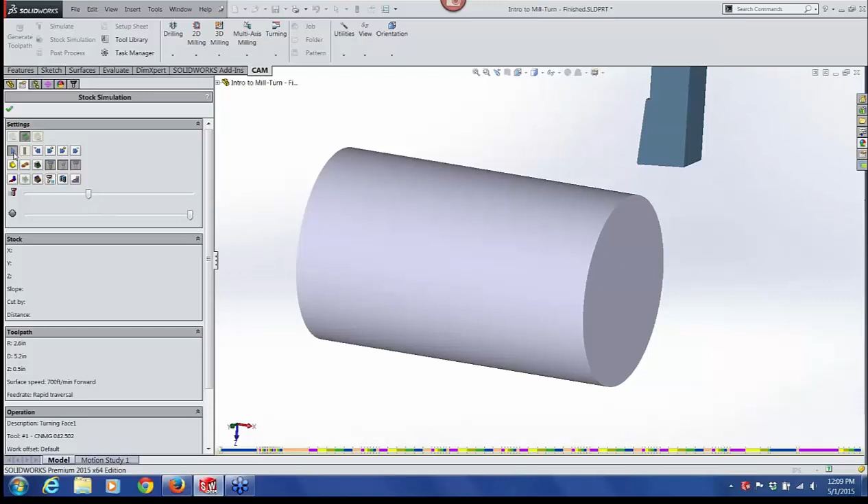Facing off the top of the part. Rough turning the OD on side 1. Come in and do a side groove. Now we're drilling side holes around the outside of the part. We came in there with a 1 1/8 spade drill, and then we are now boring the inside diameter.

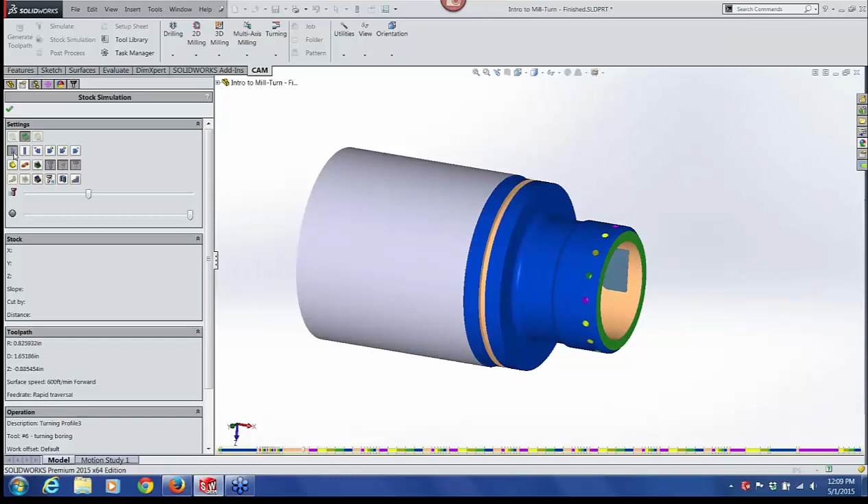2D adaptive cut, roughing out these slots around the outside of the part, and come back with a finish cut.

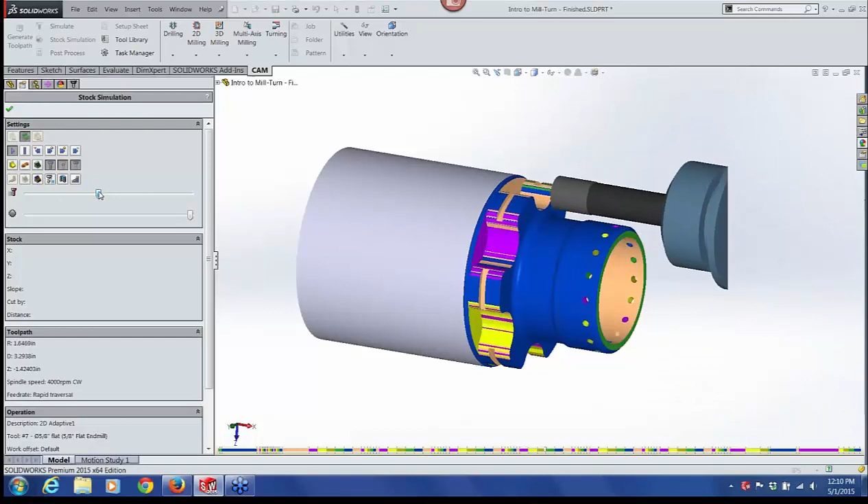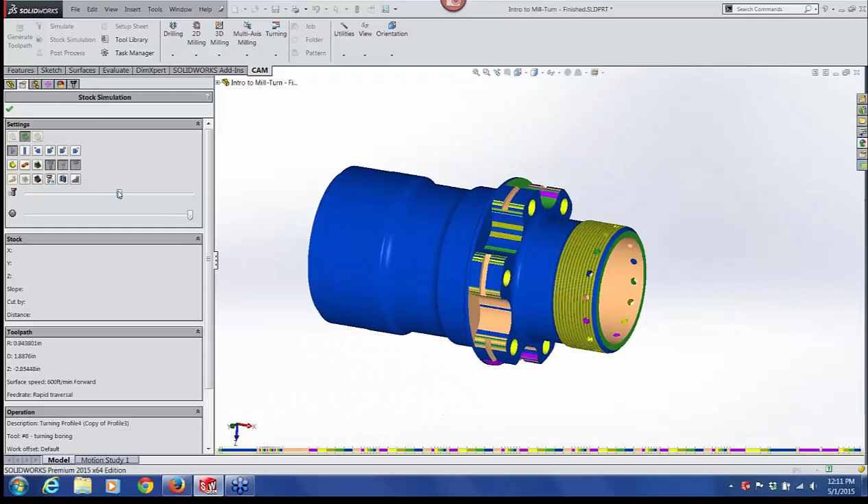The drills went kind of fast there, but we drilled into the face, drilled and reamed, and threaded the front side, and now we're working on the back side. Let's see how far we can get on the front side, and if we've got some time left over we can take a look at the back side.

Alright, so there's the end of our stock simulation. Click OK here, and let's take a look at how we have this part set up.

I'm going to basically recreate the setup and start from scratch. So the first thing we want to do to machine a lathe part, as on the mill side, is create a new job folder or a new job setup.

Now under this first drop-down menu, we can set the type to turning. As in milling, the first thing we want to do is define the model that we're going to machine.

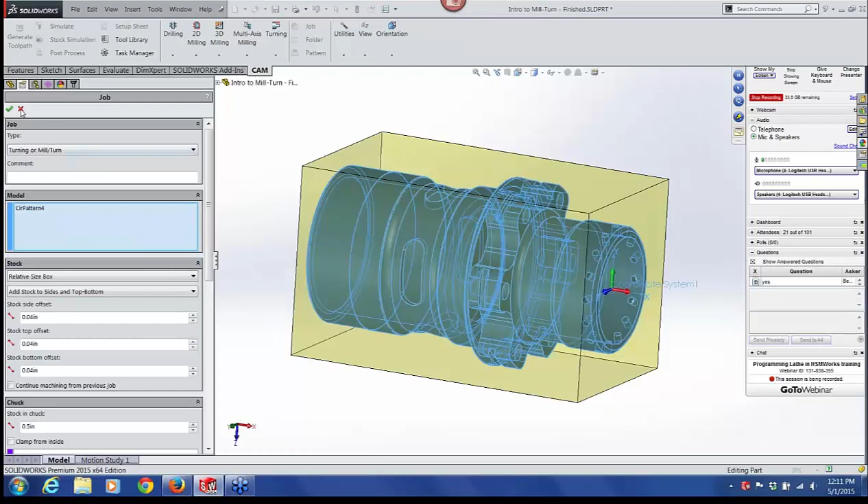Actually, I'm sorry, I need to take a step back here. Let's cancel out of there for a second, because what I really wanted to do first, since this is a lathe part, is note it has a lot of milled components on it.

So what we're going to do is create a spun profile. This is going to allow us to define a round part that would have typical lathe geometry on it. So I'm going to create a spun profile.

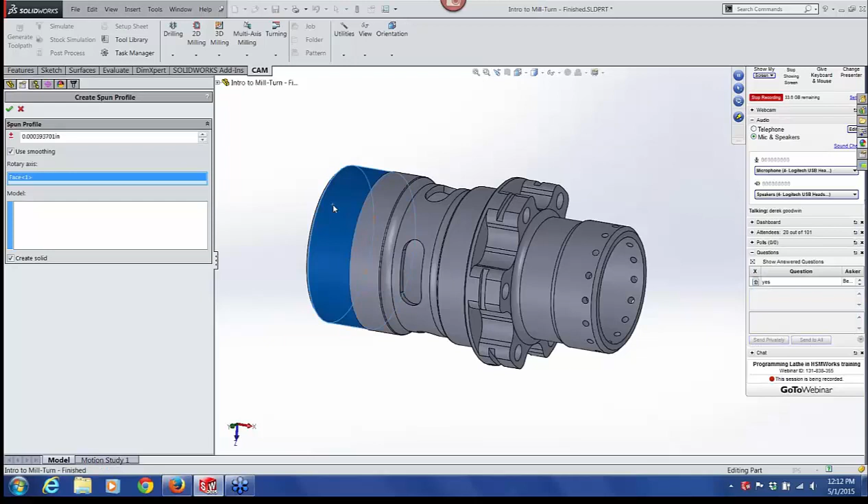I'm going to select a rotary axis. I'm going to select the model, and click OK.

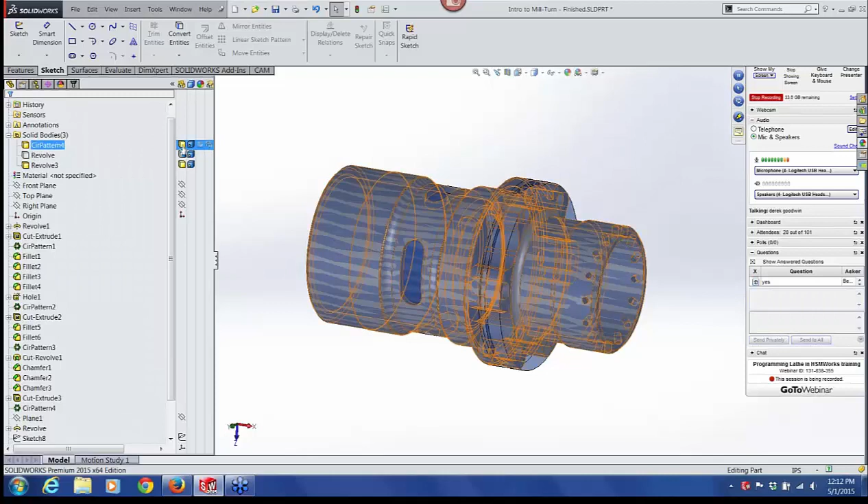And if we look back here, what SolidWorks has done is actually created a spun profile of the part. It's basically turned it into a lathe part and removed all of the milling features.

And I have 2 of those bodies now since I've done this spun profile twice.

Okay, so now let's go ahead and get started. Click on the job folder, turn this into a turning part, and the model is populated with both models.

So what I'm going to do is deselect that, and then I can just pick the spun profile.

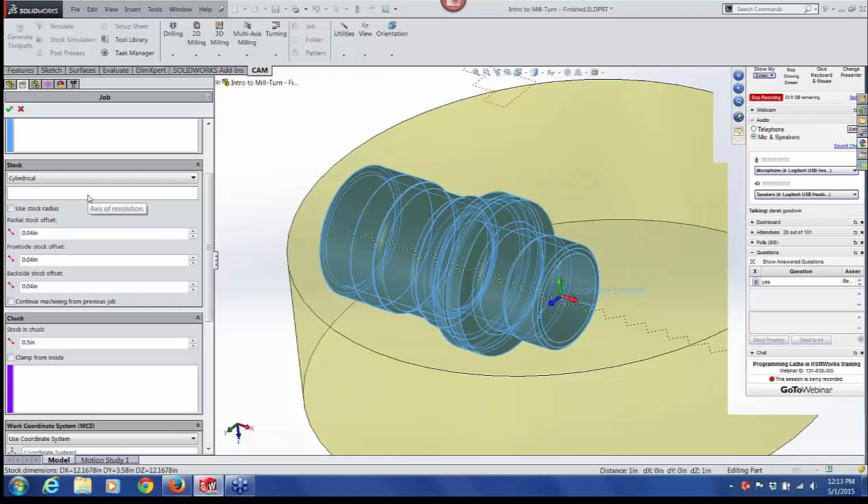Now under stock, we're going to start with a cylindrical part, and then we need to pick a cylindrical face to define the orientation of the stock.

We're going to, instead of just adding values, use a stock radius. So 4-inch bar stock seems to be pretty close for what we're going to need. So I'll go ahead and type in a 2-inch radius.

I'm going to type a home position of 0.5. This is the first Z position the tool goes to after a tool change, when the turret rotates and it rapids back towards the part. We're going to get a home position, so 0.5 is going to be the home position.

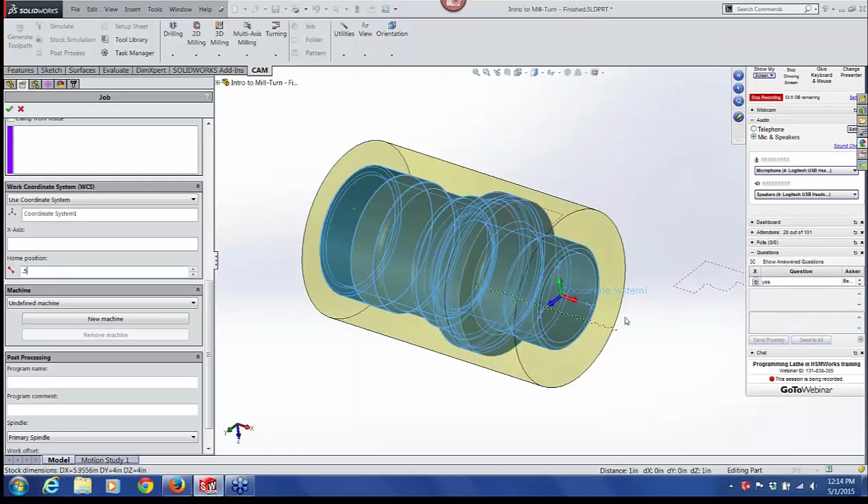And my jaws are sitting out in space here. I'm not sure if I'm doing something wrong. Okay, I still have not defined my work coordinate system. That's the problem.

So for my work coordinate system, up until now on all the mill classes, I've been showing you to pick a work coordinate system or to create a work coordinate system in SolidWorks. In this case, I'm going to create a work coordinate system using model and orientation.

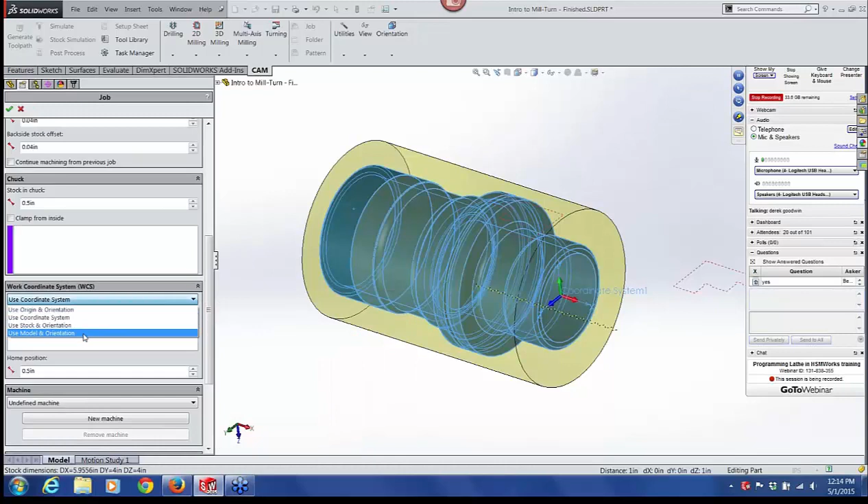I was just checking my questions page, and it looks like Pete was pointing that out to me, saying, hey, show us how to set that up.

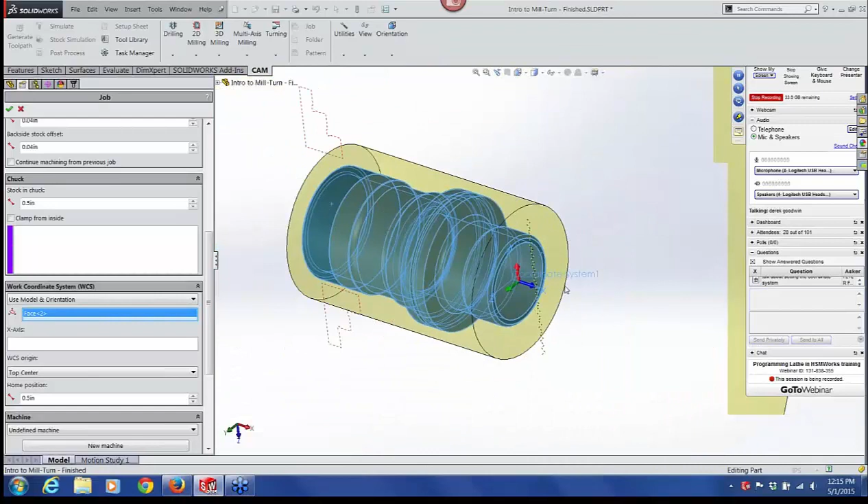So what we're going to do here is use model and orientation, with the selection box ready to go, and pick the face of this part. We've picked a face, and that's automatically set our part orientation, so you can see the Z-axis in the positive direction is aligned with the center line of the part, pointing out toward the tool turret.

And that should really do it. We're going to make this part in two ops, so it's being held in the jaws. I might take that up to maybe 1 inch, just to make sure I'm clamping those pretty good. That gives you a quick view of how your part's going to look, and I think that'll do it for job setup.

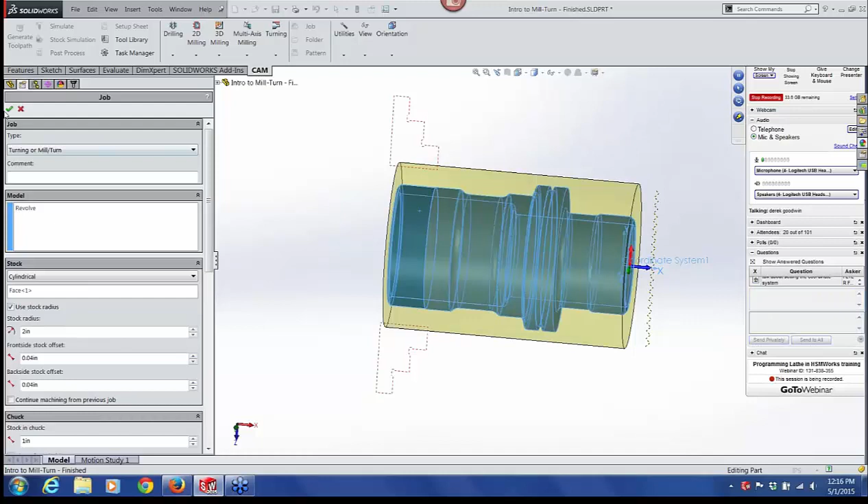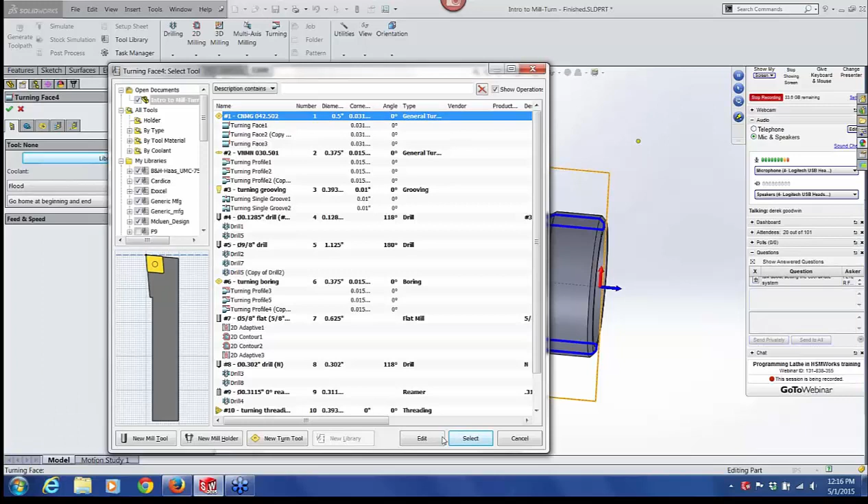Okay, first thing we're going to do is just face off the part. Go ahead and select the CNMG 042 turning and facing tool. On the facing toolpath, you just need to click OK because we've got our stock defined and our model defined, so it knows what to do.

I'll give it a maximum spindle speed of 3,500 and click OK. Again, my default behavior in HSMWorks is to just click OK and see what the toolpath does. It usually gets me pretty close the first time, and if it doesn't, I can always adjust things.

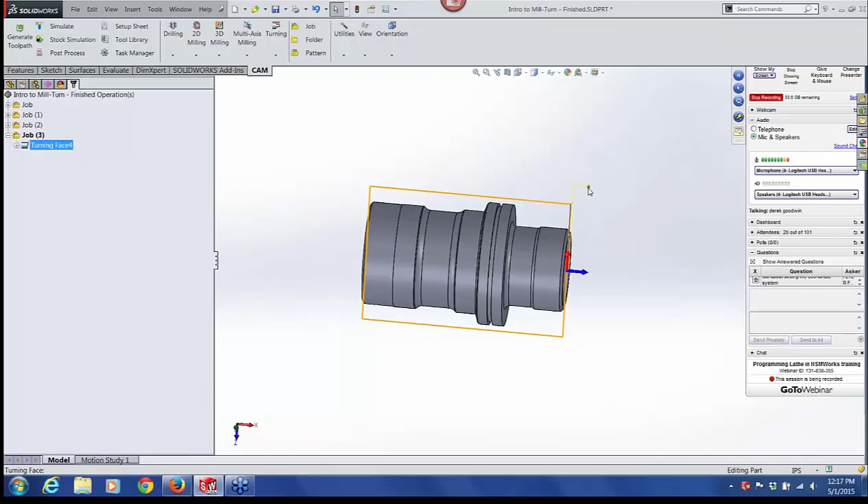Okay, we have a facing toolpath. And if you'll notice this little dog leg here, when I set the home position to 0.5, this is what I meant. The home position is basically half an inch off the face of the part.

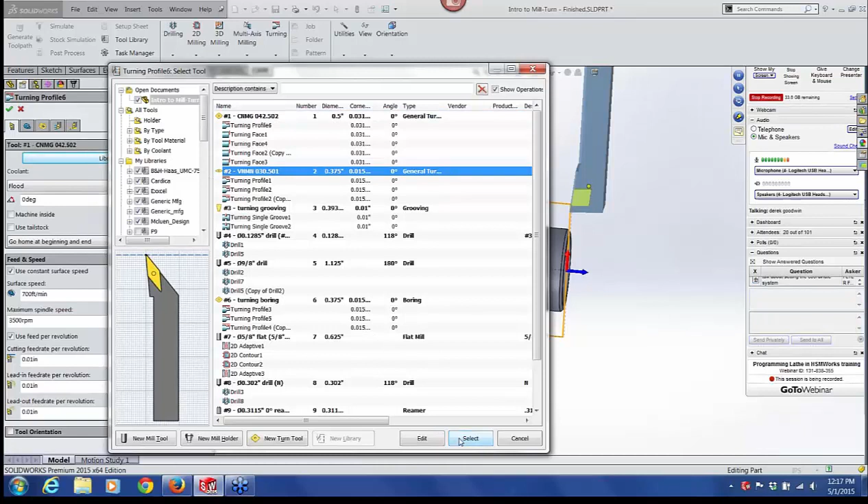Okay, the next thing we're going to do is turn the outside diameter. Click on Turning Profile, pick a different OD turning tool, and click on the Model tab.

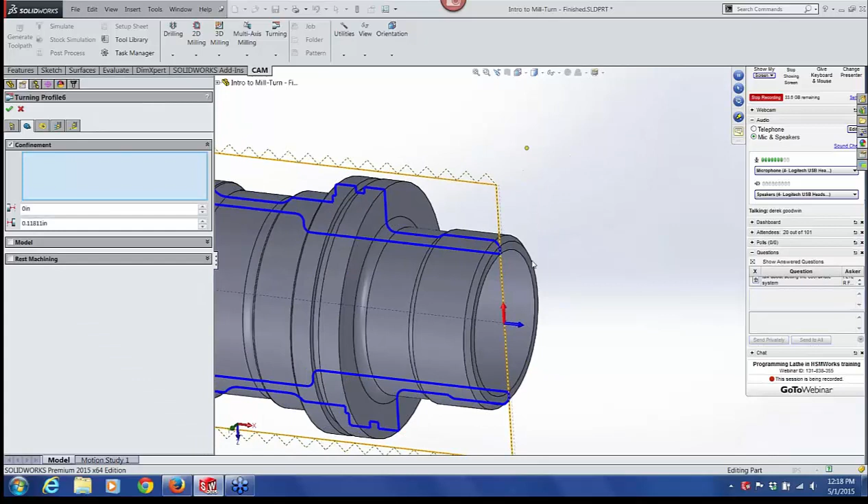Now, the model's already defined, but we don't want to cut the entire part, so we're going to set a confinement, basically a boundary, to stay within. I'm going to pick that front face and that back face. You'll see this almost looks like threading geometry up at the top — it shows you where we've constrained the cut to. Now, for the model, we've got a couple of models, so let's make sure we're choosing the spun profile.

So I'm going to expand the SolidWorks history tree and just define that revolved model to make sure everything's good. Let's click OK and see what we get.

So that looks pretty good. It's turning a little bit past the edge of the part, and I think it's a 35-degree angle on this insert, so it's allowing the insert to dig in at the back.

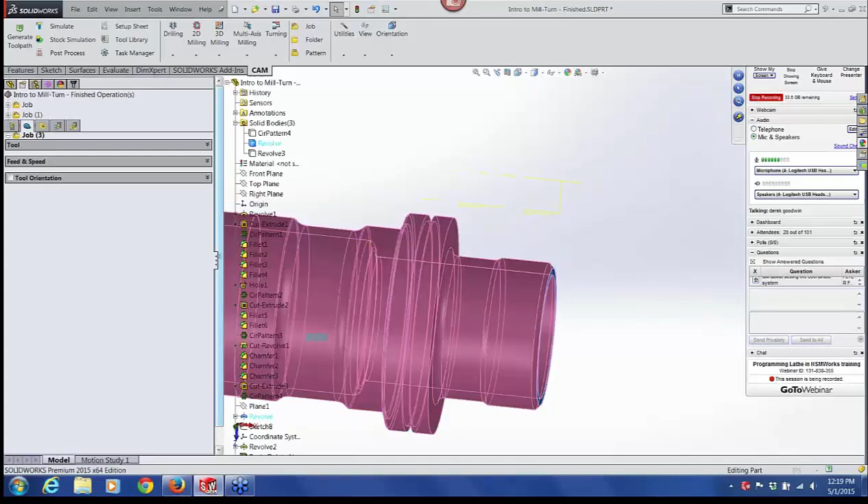I don't really want it to do that, so let's go back here, right mouse click and edit the cut, and I'm going to take this confinement down to 0. Right now it's forcing it to overcut in the Z-direction, going past the face of that part by 0.118. So let's put that back to 0, and that's a little more like what I want to see.

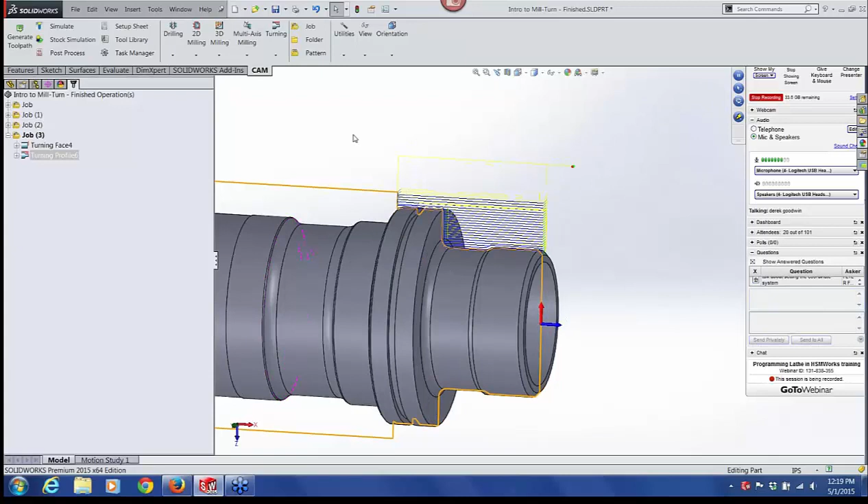So we've got the part faced, we've got it turned. The next thing we're going to do is machine this groove. So I'm going to pick turning, single groove.

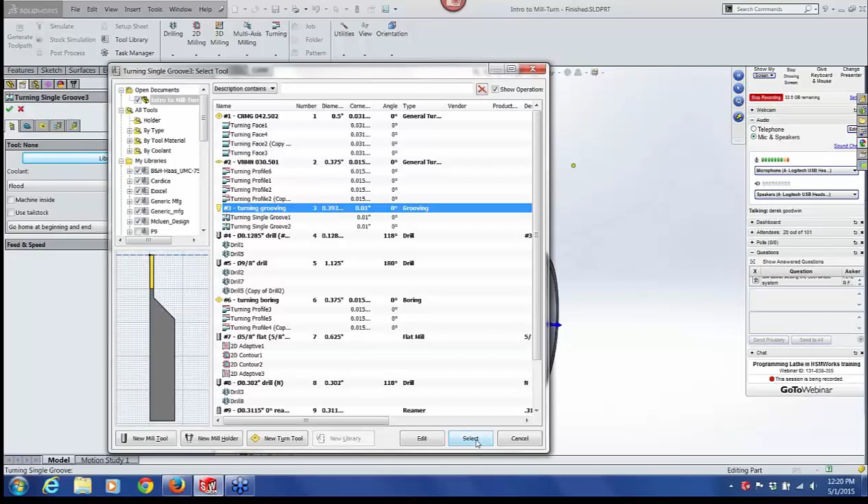On the first tab, I'm going to pick our grooving tool. For the geometry tab, I'm going to click in the selection box and pick that far face of the groove.

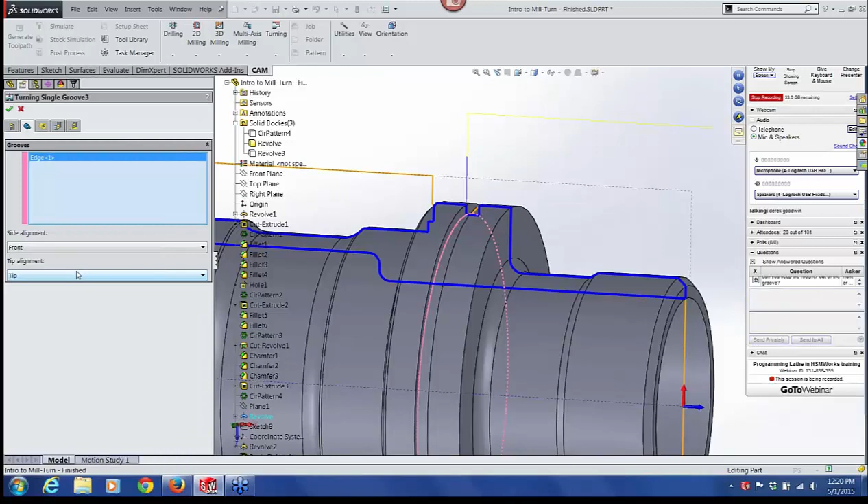And then on the heights tab, if I left this set to model bottom, it would actually machine that groove all the way through the part. So what we're going to do is pick a selection for the bottom of the cut, and now we're going to pick that face. You can see this blue cylindrical shape gives you an idea of the depth of your cut.

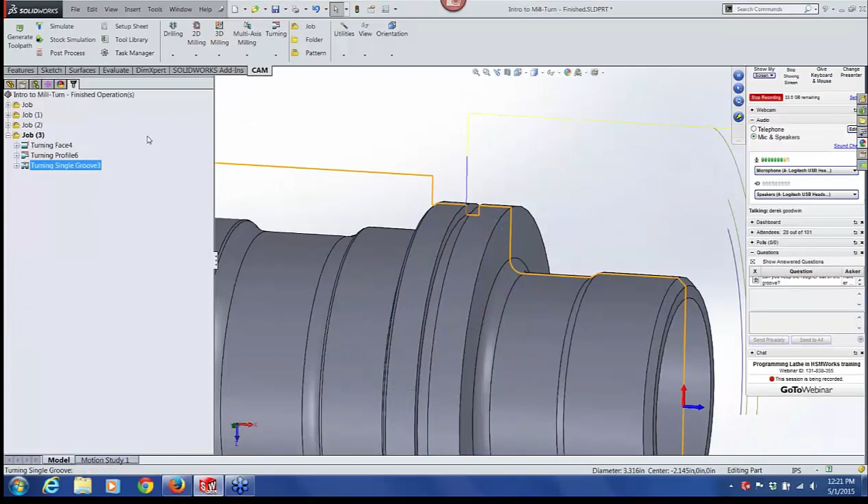So all of that looks pretty good. Let's click OK and simulate, and see what we have.

Okay, I like that. Just take a moment, let me check our questions pane quickly. This is going to be a little bit tricky since I'm working on one monitor today, so it makes it a little bit difficult to read my questions. I'm actually going to undock that for a second.

Can you keep the rougher out of the groove? I'm not sure about that. Let's keep that question for a moment, and maybe I'll get CJ online here in a minute. He's a little bit more experienced than I am on the lathe stuff, and see if he can help us with that.

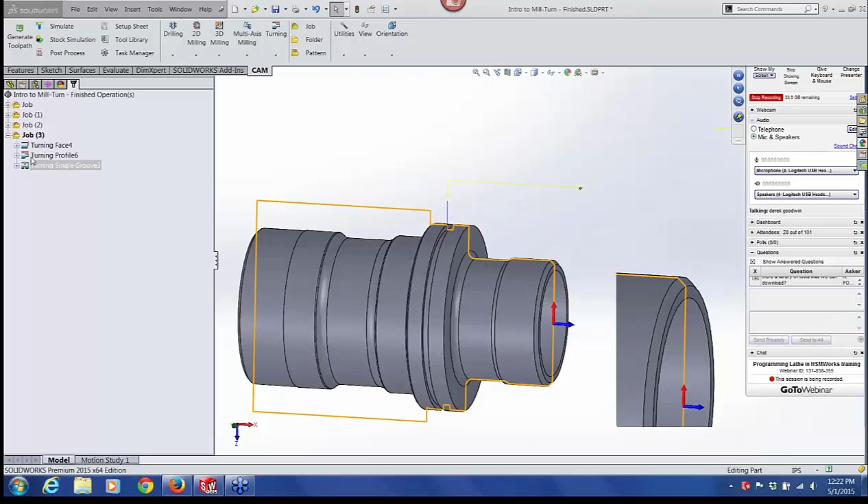Yes, thanks CJ. Short answer is yes. So how would we do that? There's a check mark in the Passes tab called Allow Grooving, you would just uncheck that. Okay, let's go ahead and do that, take a quick look there. So that would have been in this turning face - right mouse click, edit, and is that in the Passes tab? Allow grooving, uncheck that box. Click OK, and that keeps it out of the groove.

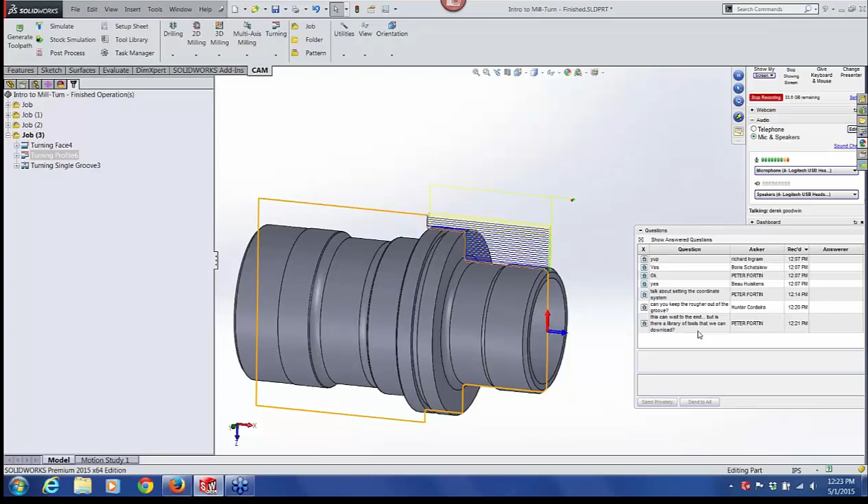Okay, hopefully I can find this question pane again later. I'm just going to kind of drag it down here.

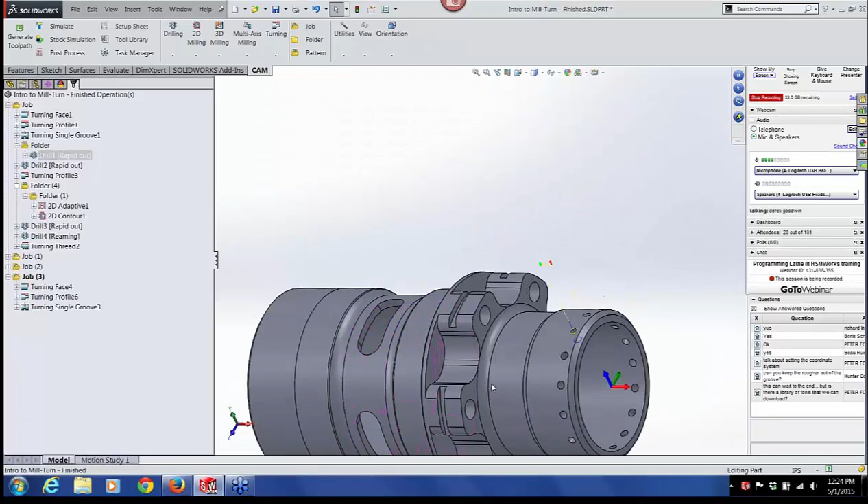Okay, what are we doing next? Let's see, we are going to drill the side holes. So what I'm going to do here is go back to the SolidWorks tab and make our actual part visible, and take a quick look at what we had going on here. Okay, so we're going to drill first that side hole, and then we're going to add a circular pattern to drill that hole around the diameter.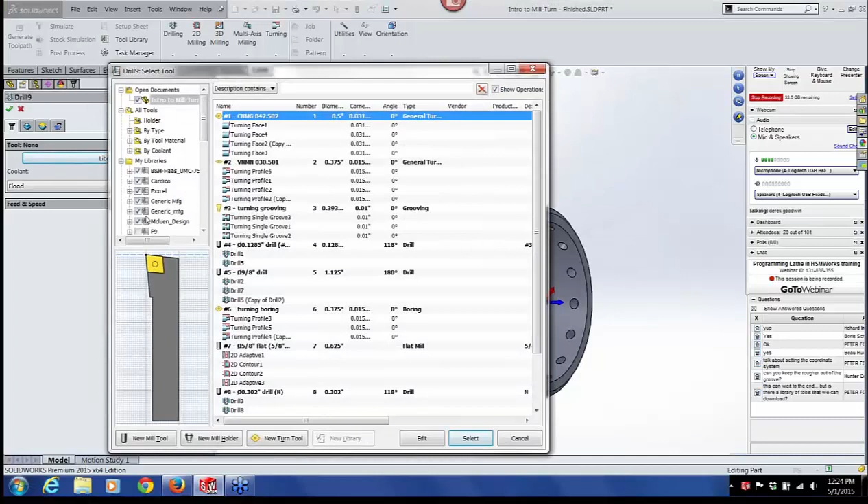So, drilling - drill. I'm going to pick a 0.1285 diameter drill, select that tool. Click on the Geometry tab. Now the first thing we want to do here is to set our tool orientation, so I'm going to check the box. This is basically telling it that we're working in a different orientation than we were on the lathe, because the Z-axis now needs to flip out to the side of the part.

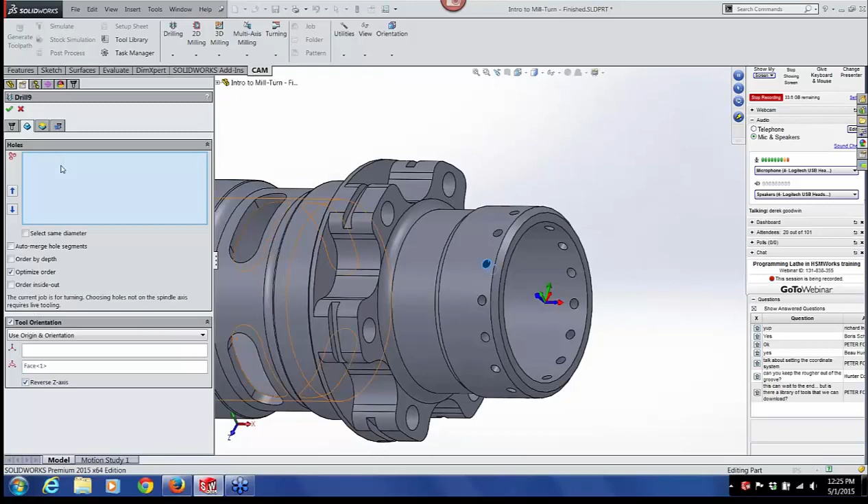I don't remember which hole we picked, but I don't really think it matters. So I'm going to pick a cylindrical face to set the tool orientation. I see the Z-axis is pointing down, so I'm going to reverse that axis so that the Z-axis is now pointing up. After I've set the tool orientation, I'm going to go into the hole selection dialog box and go ahead and pick that same cylindrical face. Hopefully the software is going to let me do that.

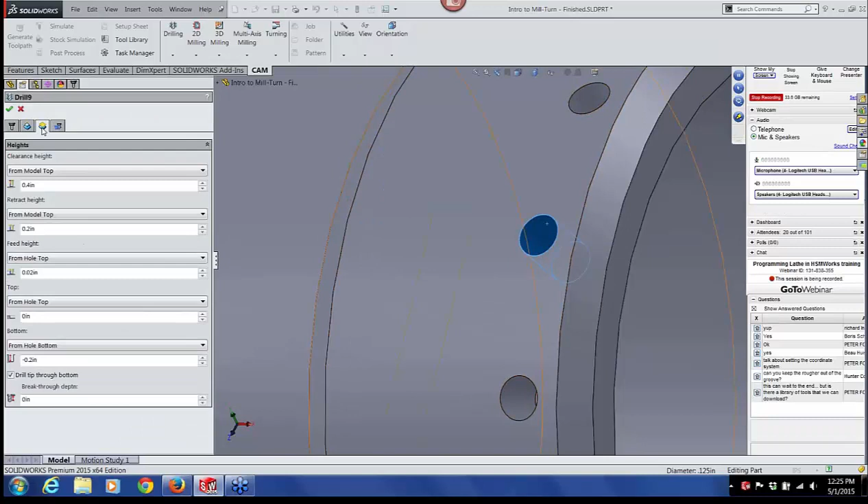Sometimes it does get a bit funny when we're on a GoToWebinar. Try clicking out of there for a minute and back in. I know what the problem is - that needs to be the model chosen in the job selection, because I have the revolve selected instead of the actual model.

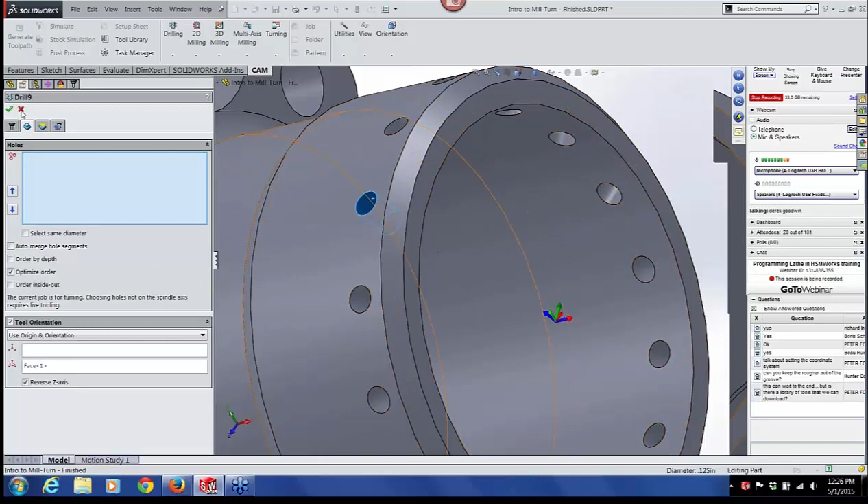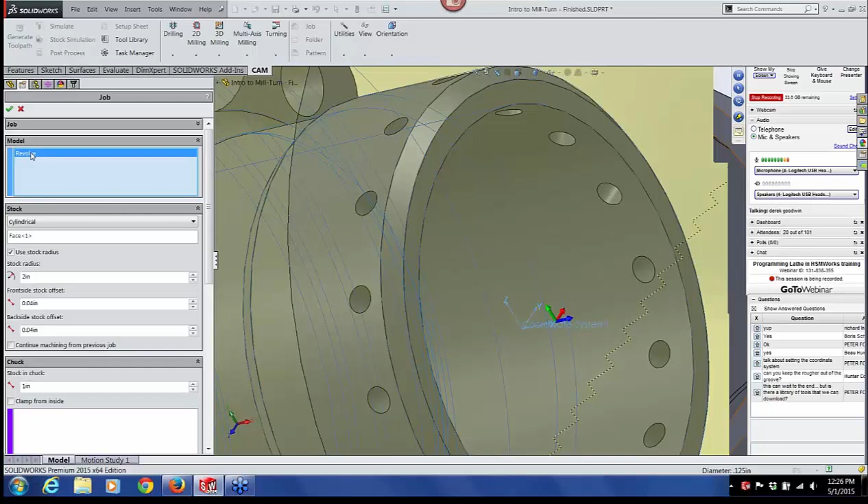Got it, thanks for noticing that, CJ. Okay, so I'm just going to cancel out of there for a second. I'm going to edit the job. Sometimes we're going to be picking geometry as we're moving through this part, and sometimes we're just going from the model itself. The mistake I made there was to pick the spun profile as the actual model, so I'm going to clear that, and I'm going to actually pick the part itself.

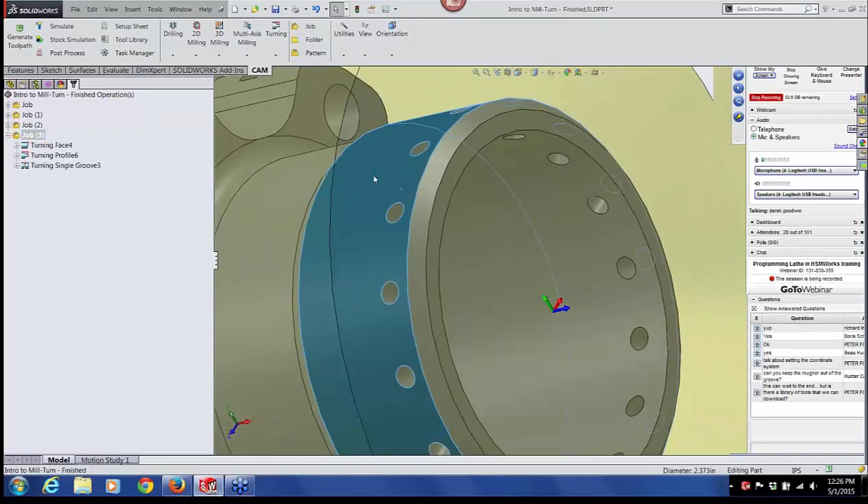Okay, and I'll need to regenerate those tool paths, but I think everything will still stay pretty good. Okay, it looks like everything's stuck with us there. Okay, let's try that again.

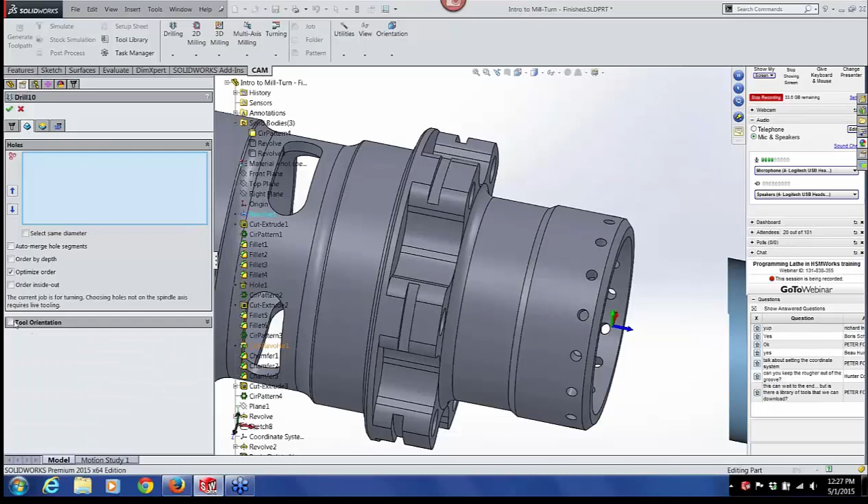As I always remind you folks, this is live TV, anything can go wrong. Back to our drilling tab, pick a drill. Geometry tab, tool orientation. Now we'll go into the selection box and pick the cylindrical face, and as you see, we're still needing to reverse that Z-axis. So click that.

Check on our heights tab. We don't really need to drill through so far, but we definitely do want the drill tip to drill through the bottom of the hole. Passes tab - this could be deep drilling, that'll be fine, and we'll get some peck action.

Okay, that looks good. Now what we're going to do is complete those holes around the outside of the part.

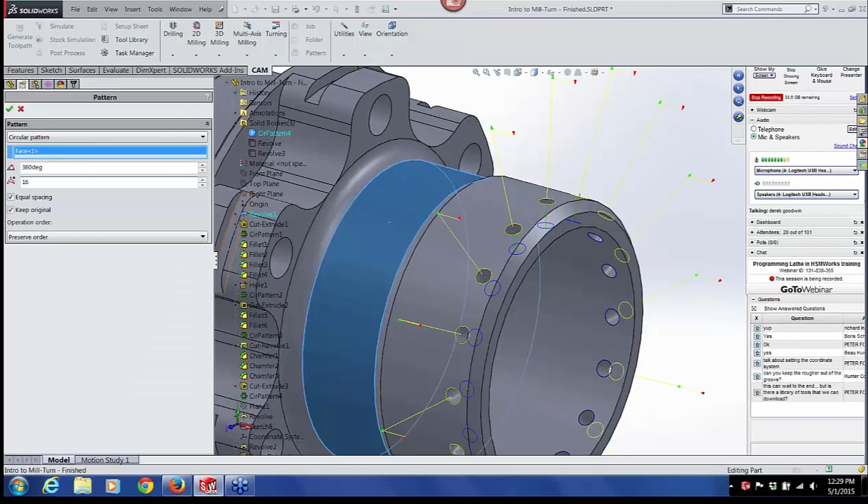So what we're going to do is select that drill operation, and then click on pattern. We're going to create a circular pattern - you'll notice this is SolidWorks functionality. For a selection, we need to pick a face, basically an axis of rotation, so we're going to pick a cylindrical face, and we're going to have 16 instances of this hole. Each hole is spaced 22.5 degrees apart. Click OK.

Highlight the folder, and we'll simulate the drill. Okay, all that looks good.

Now, as we created a pattern, the software automatically creates a new folder. This folder is the pattern, and this operation is the operation that's being patterned. You'll notice that folder number 6 is bolded now, which means it's the active folder. If I create any other operations now, they will also be part of this pattern folder and will be repeated in a pattern. So what I need to do is go back out to my actual job folder where we've done our job setup, right mouse click, and say make default folder. So whichever folder is bolded, that is where the toolpath will be applied. Just be aware of that.

Okay, the next thing we're going to do is rough this inside diameter here. So we're going to go straight in there with an 1 1/8 inch spade drill. So drilling.

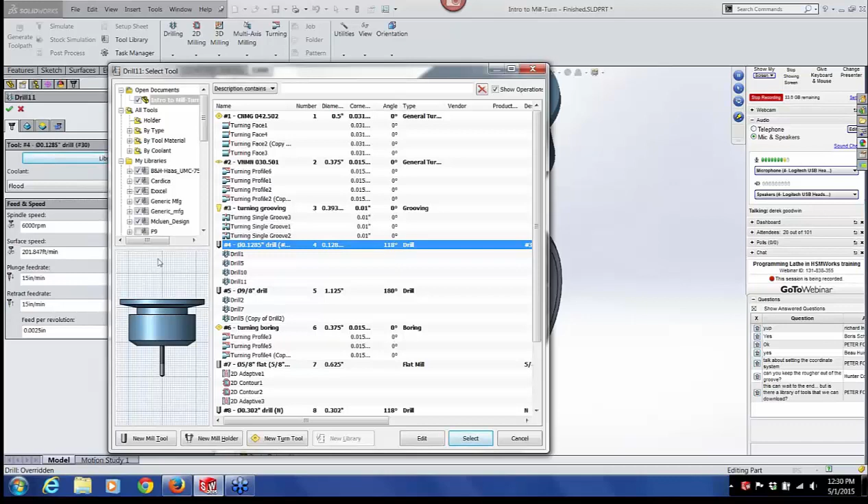Click on my tool library, pick a drill. Click on my geometry tab. Now you'll see that the tool orientation is still active.

We're now working back in the Z direction for the lathe part, so let's uncheck tool orientation. You'll see your Z axis is now pointing straight out.

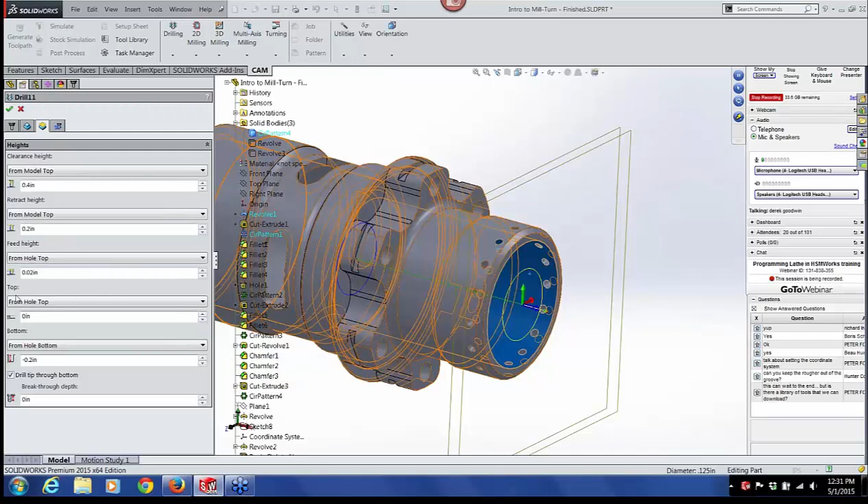Our hole selection tab is highlighted, so we'll pick the face that we want to drill. Go into the heights tab. In this case, drilling through the hole bottom, going an extra 0.2 is probably a good idea. We're going to need to get in there with a boring tool momentarily, so we'll accept all of that.

And nice short pecks there. That looks like we're good to go. Okay, so we've roughed out the inside diameter.

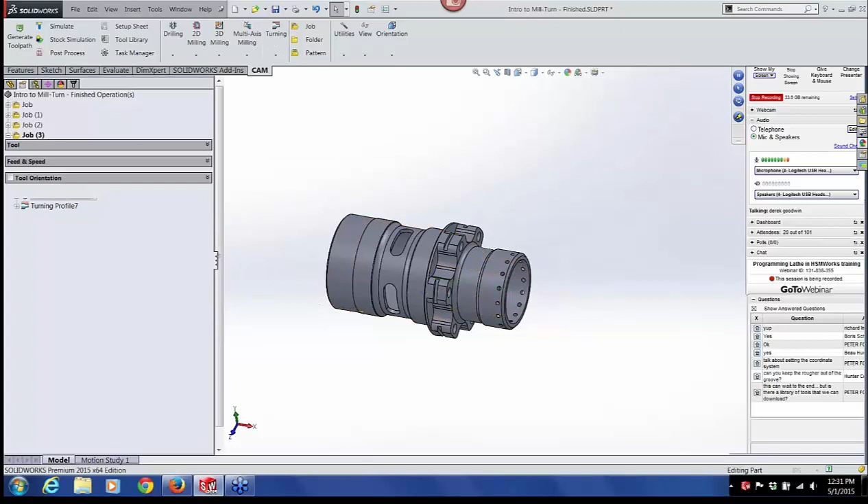Now, the next thing we're going to do is apply a boring toolpath. Turning, profile. I'm going to pick a boring bar from my tool library. We're going to check the box that says machine inside, so now we've defined this as an ID operation.

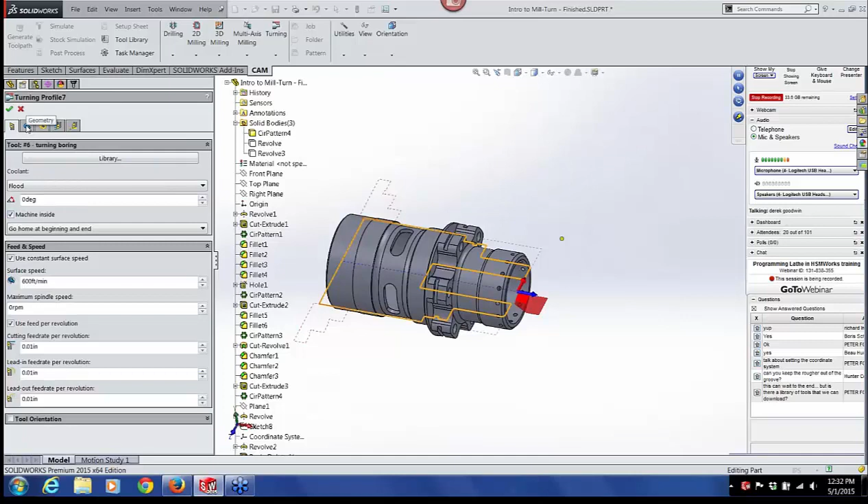Okay, again it's looking at the whole model, so we're going to select a confinement here in the geometry selection, and we're just going to pick that internal face. So it's just going to confine the tool to that area of the geometry.

Right now it's set to drill past the back face by about 0.118. You'll remember we had the drill going about 0.2 beyond the back face, so 0.118 is probably a little heavy, but I definitely want to go a little bit past, so maybe at least enough to get past the radius on the insert of the boring tool. So let's go about 40 thou past.

Now on boring, this is where it gets a little bit tricky on the heights tab, and in general in HSMWorks the heights tab was probably what was most difficult for me to learn, to get my head around. The software is pretty easy once you know how to use it, but the heights tab takes a little bit of thought, and especially on boring toolpaths - I believe this is actually being addressed - but it's a little bit tricky. So let's work out how we're going to set the heights for an ID boring tool.

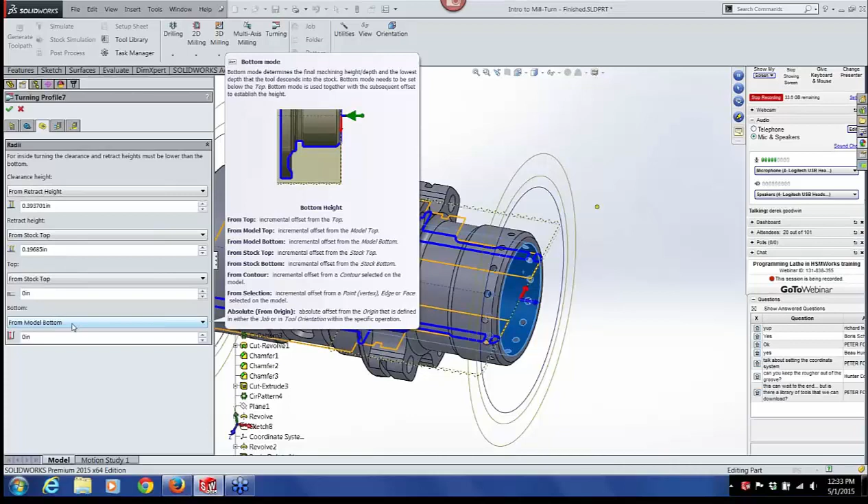And we're going to really start from the bottom here and work backwards. So the bottom of the cut, which is depth of cut, is the way you want to think about this particular selection, is going to be where the cut finishes. So we're going to select that cylindrical face. It's a little bit counterintuitive because with bottom you might think it's coming smaller and smaller and smaller. In this case, because we're working outwards, the actual face that we're going to machine is the bottom of the cut.

Now, we pre-drilled this with a 1-1/8" diameter drill. So where we want to start cutting with the boring bar needs to be set. So what we're going to do is we're going to set an absolute value. And right now it's set to absolute from the origin, which is the center line of the part. We've already got a hole in there. I'm sorry, the drill was 1-1/8 diameter. So we're going to set our height to the radius of the drill that we used. So that value is going to be 0.5625.

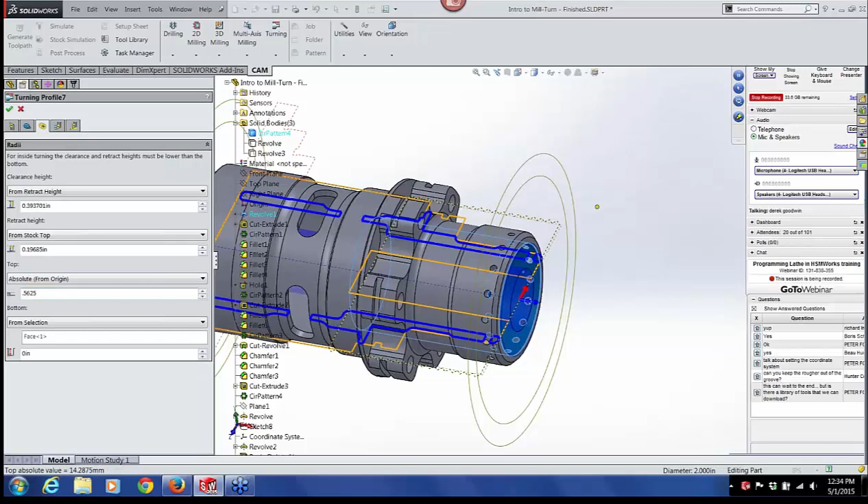Now, we need to set our retract value, and I'm going to set that from minus 0.01 from what we defined as the top. Okay, so this was supposed to be 0.5625. Okay, so that it retracts 0.01 below 0.5625. And then the clearance height we're going to set just from the retract height, which is what we've just defined, and we'll just say minus 0.01 from there.

So I realize this is a little bit complicated and it might take a while to work through. It certainly did for me. But give us a call when you're working on a lathe part and you're struggling with this, and we'll help you get through it.

Passes tab, I'm just going to accept my defaults, and let's see what we get. So we'll click OK, and we have an ID boring toolpath. So we're good to go there. Take a minute to just do a quick simulation. And there we go.

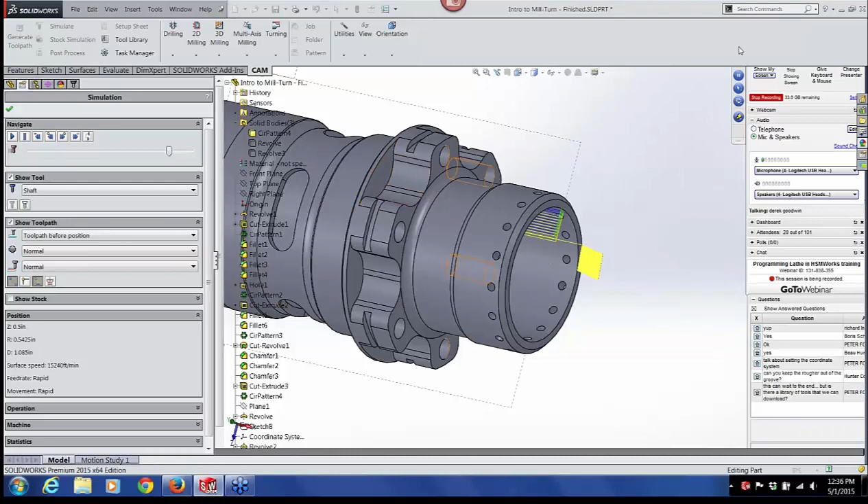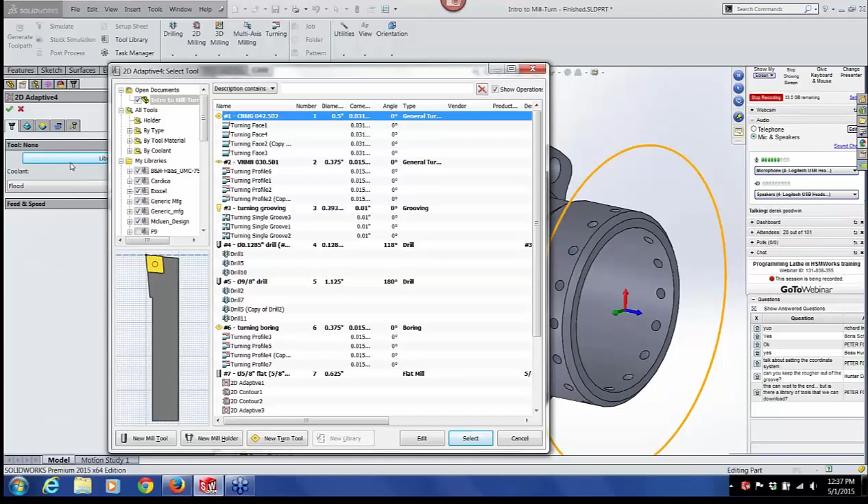So the next thing we're going to do here is to machine one of these slots. So again, this is going to be a live tooling operation on the face. What we're going to do is we're going to rough them out, and then we're going to finish them out. So I'm going to pick a 2D milling, 2D adaptive cut. I'm going to select a 5/8 diameter flat end mill.

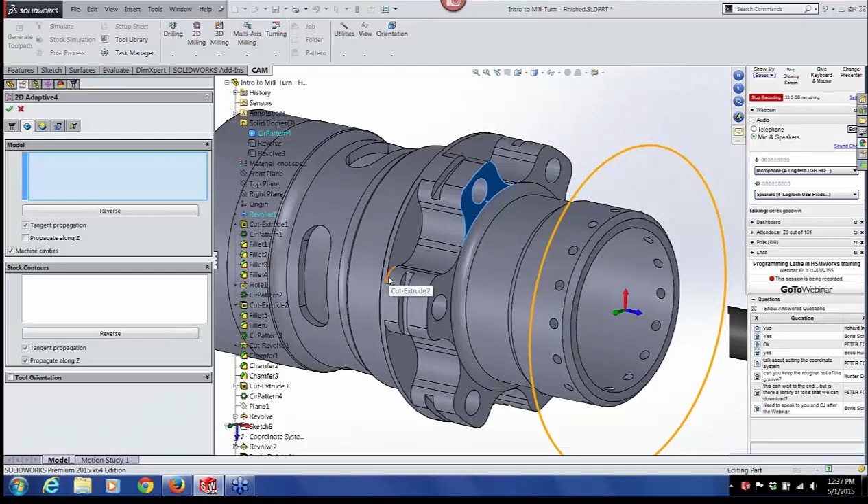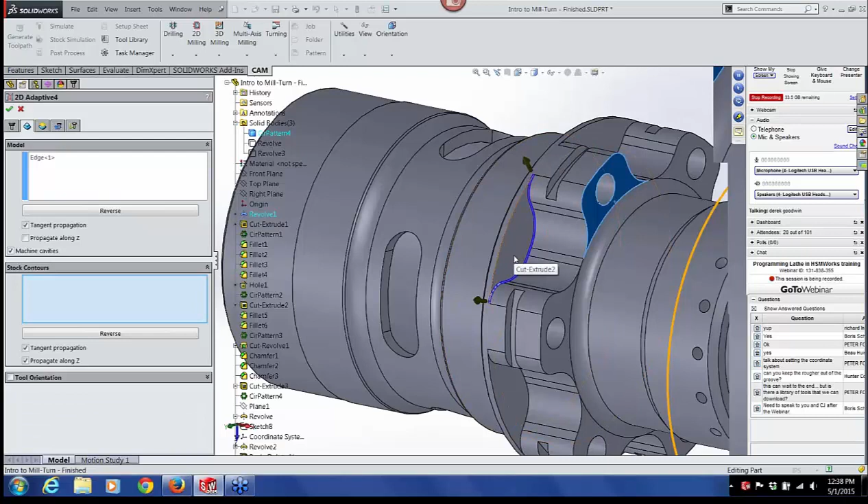On the Geometry tab, this selection is a little bit tricky. So what we're going to do, we want to pick in this area here. I'm going to uncheck Propagate Along Z so that I can just kind of contain where this chain is going to be applied. And we get my direction right. And that looks pretty good. So that's the contour cut that we're going to apply with the 2D adaptive cut. And we also need to pick the stock contour, which is basically telling it where the stock is going to need to disappear from, which is this area here.

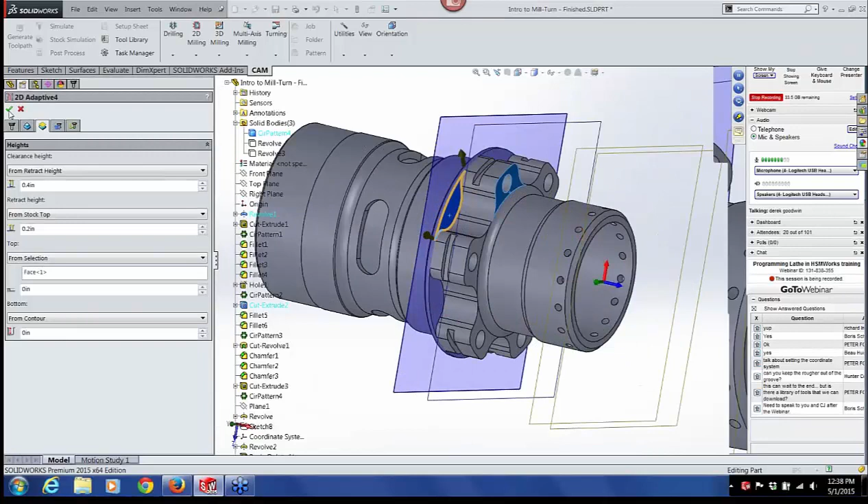On the Heights tab, let's see, for the top of the cut where it begins cutting, it's already defaulting to that face there, which is good. And then on the bottom of the cut, it's defaulting to from contour, which is where we define the contour, so that also looks pretty good. And let's just accept the defaults and see what we get here.

So this is a pretty good looking toolpath. You'll see we're taking this in one depth of cut with a 5/8 end mill. It's pretty deep, but we have a shallow step over. So typical high-speed machining toolpath, which is what 2D adaptive is, using as much of the flute length as we can.

And this is really where HSM started. HSM stands for high-speed machining, and the original toolpaths in the product line were the adaptive clearing toolpath. So fantastic toolpath, great way to remove material. Not a lot of load on the tool there, even though it's cutting a pretty deep slot all in one shot.

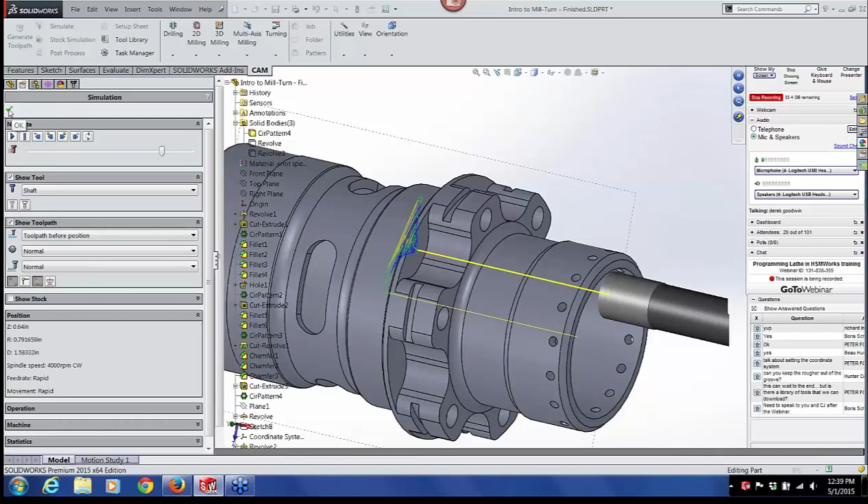Now we're going to follow that up. And so the other thing I should have pointed out here in this cut, the adaptive cuts will always default to leaving stock. They are roughing toolpaths. They'll give you a very good efficient roughing toolpath, but not necessarily a very good surface finish because they're designed for roughing. So we'll leave stock with that. And then we'll follow up with a 2D toolpath just to finish off that sidewall.

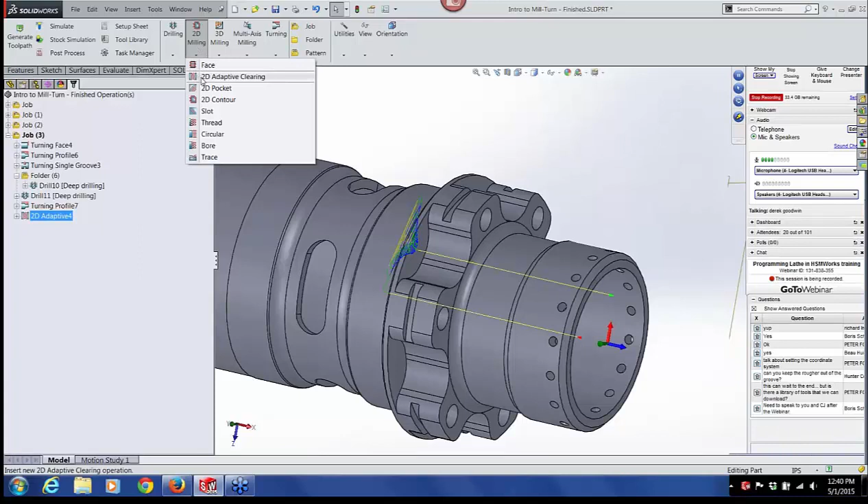So 2D contour, defaulting to the same tool. Pick the geometry in the same way. You notice I'm zooming up there. The first pick, whenever you pick a chain, defines direction as well as the chain that you want to cut.

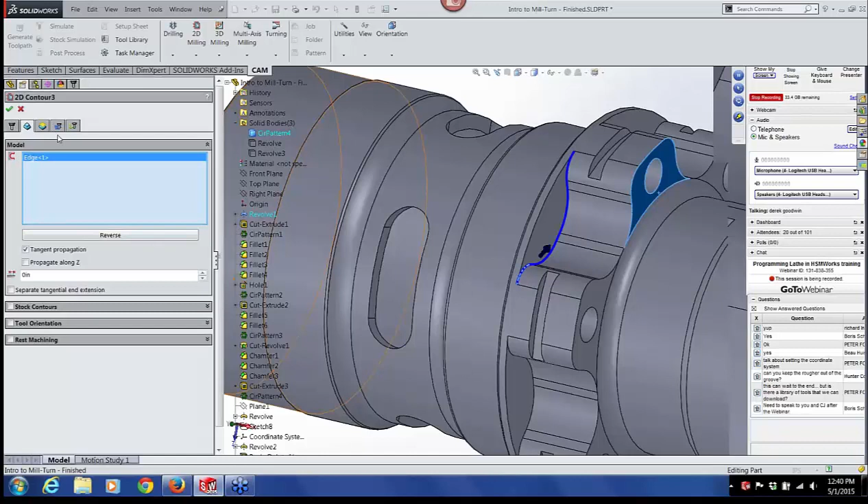I don't think we need to define a stock contour for this. Let's check our heights tab. Probably it's all pretty intelligent, defaulting to the right things. Let's just click OK, and we have a nice 2D contour toolpath just to finish off that sidewall.

Now we're going to want to repeat that pattern around the outside. So again, I'm going to Control select the two operations that we're going to pattern, then click on the pattern icon. It's a circular pattern, so we're going to define an axis of rotation and how many instances there are. In this case, there are 6 instances around the part.

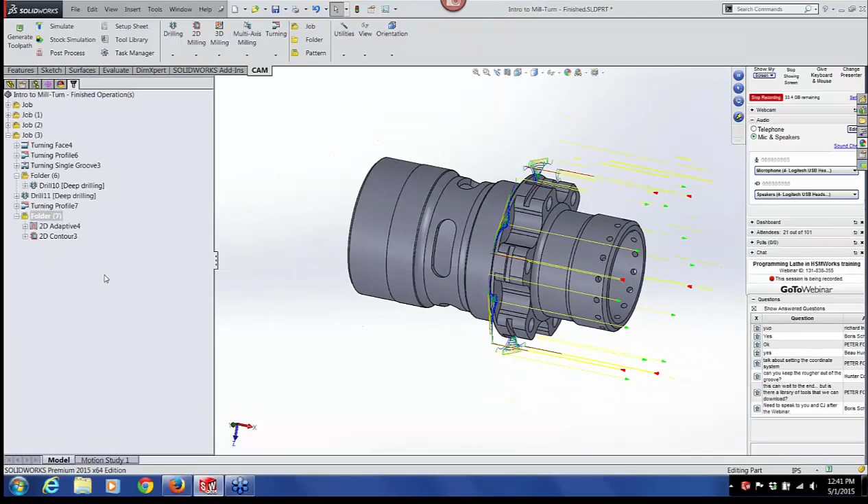Click OK. And we see we've nicely patterned those 2 toolpaths around the part. Again, this folder is now bolded, meaning that it's the default folder, so any new operations I were to program right now would automatically be patterned. I'm going to go back to my job folder, right mouse click, make default folder.

We are getting a little bit of excess noise there. Not sure who that is, so I'll mute the guys. Just send me a text, whoever needs to be unmuted, and we'll get you off of there.

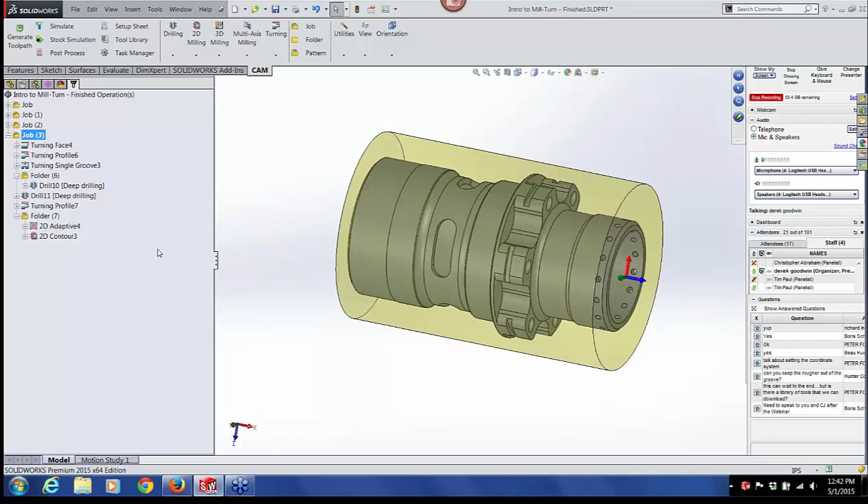Okay, back into the job. So we have the pattern. The next thing for us to do is to drill and ream these holes in the face of the part.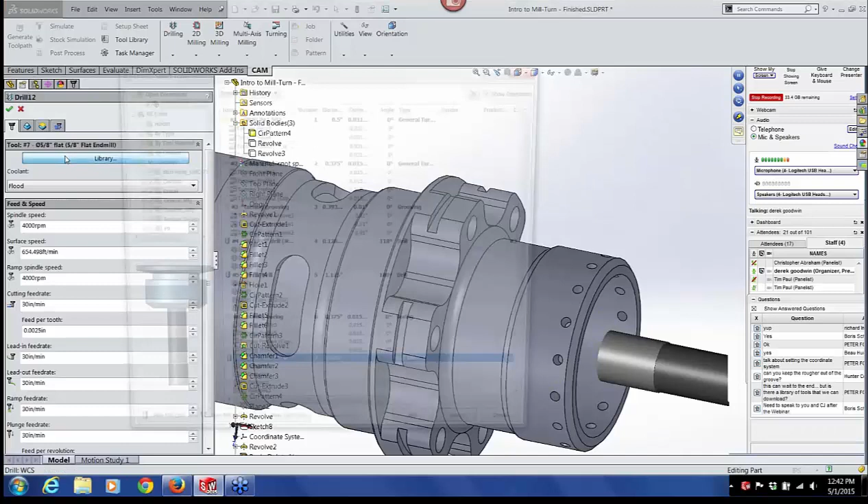Go back to drilling. Pick a 302 diameter drill. In this case, we're coming in from the face, so what we can do, we won't need to pattern this. We can just click select same diameter, and that will automatically populate all the other holes that are of the same diameter.

Actually, we've got a reamer following this, so I think I will let that drill through a little bit deeper. So we'll go 200 thousandths past the bottom of the hole, plus the drill tip, and deep drilling full retract. That depth could probably be a little bit deeper.

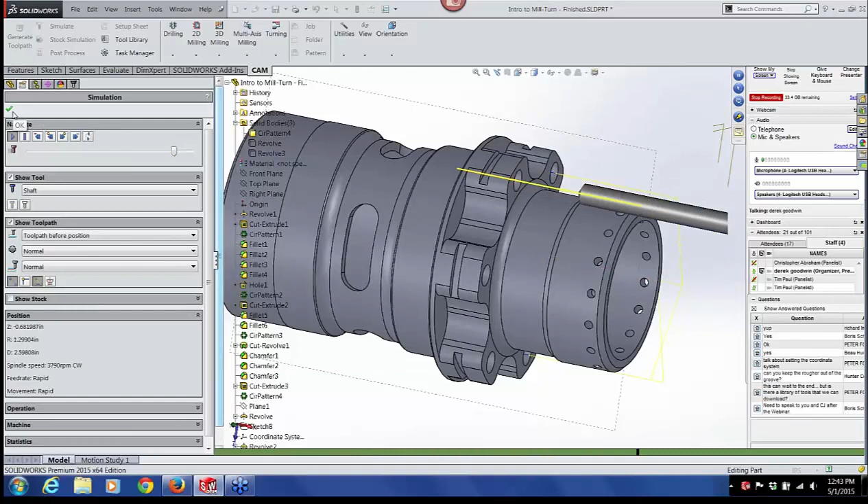And we'll simulate that and see what we have going there. Okay, all that looks good, and we can just quickly Control D to duplicate that cut. That's one I learned from Tim, who's online with us today, and I like that—it's a lot quicker than copy and paste.

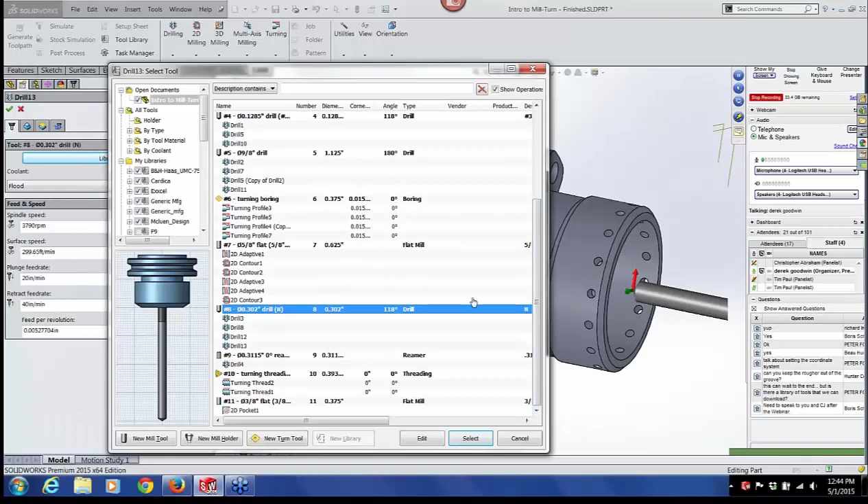I'm going to edit that toolpath. Click on my tool library and pick the 0.3115 diameter reamer. Nothing to change on the geometry tab. On the depth tab, I don't want to go through by 0.2. I'll just go through by maybe 0.1, and that leaves a little bit of room down there for some chips to get out of there.

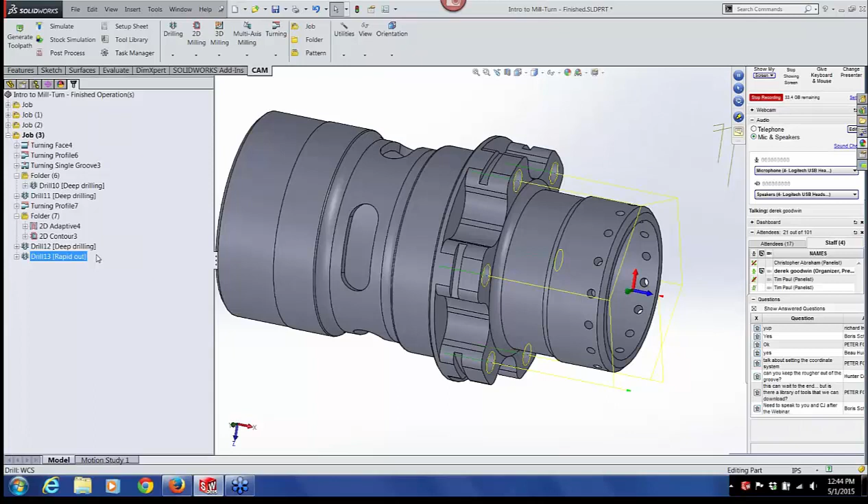And this could just be... I think drilling in, rapid out will be fine. Click OK there. So we've got our reamed hole. Okay, and we're in pretty good shape.

So the last thing we need to do from this side is the threading on this OD, which we didn't really talk about. Let's see what we have here. So we've got a 2.375 diameter journal here. It's been modeled to be a couple thousandths undersized by the look of it, so the diameter is 2.373, which makes sense. And I believe it's 16 threads per inch.

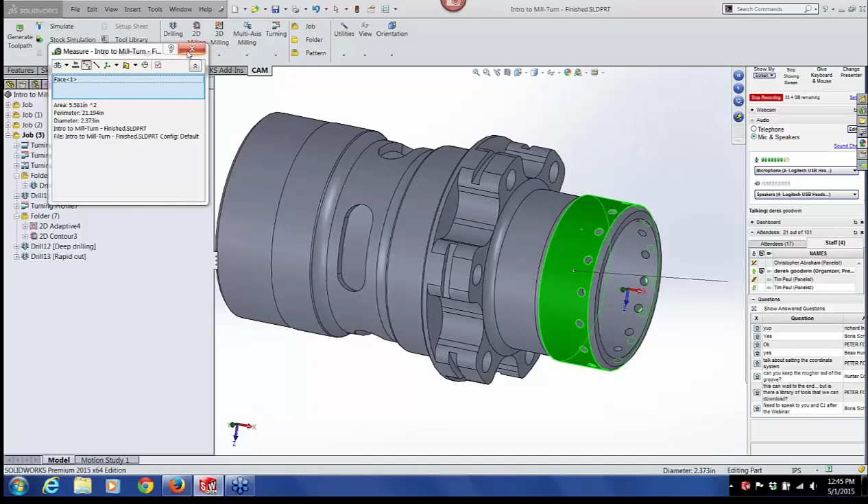So let's apply the threading. Let's go turning, thread, and pick the threading tool.

On the geometry tab, we're defaulting to 0.1 and 0.1. So basically the threading tool will start in the Z positive direction, 0.1 away from the part, and we'll cut past the end of the thread by 0.1. So that should be good. Our threading selection box is ready for selection—color blue means it's ready to select geometry. So we just click the outside diameter of the thread.

When you are threading, you're going to want to have your machinery's handbook handy, because you are going to need to know a few things. In this case, the thread depth has been predefined as 0.037. We are taking 5 passes, and then the thread pitch is 0.0625, so that's 16 threads per inch.

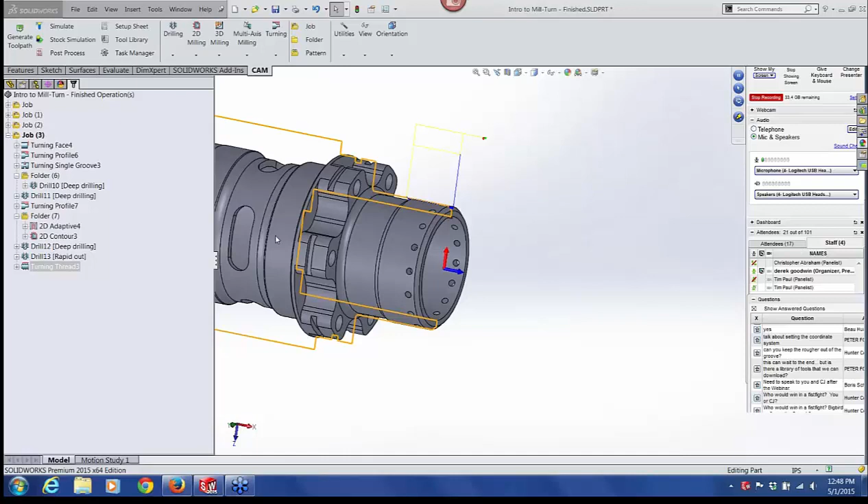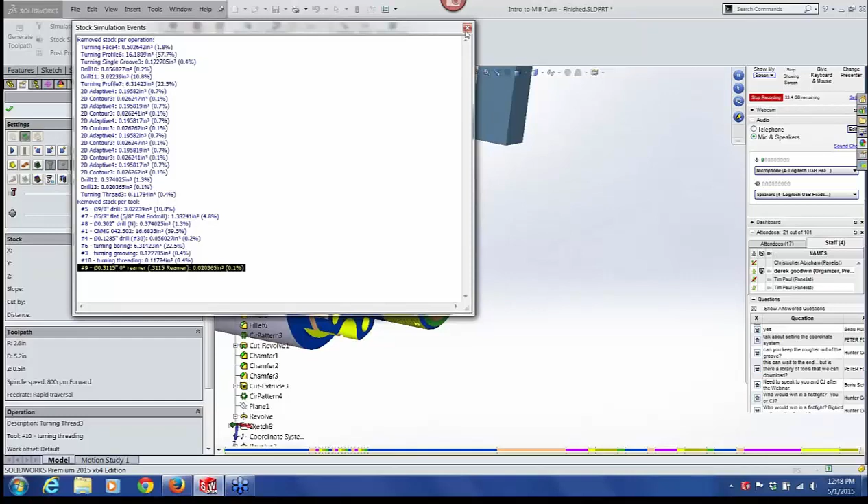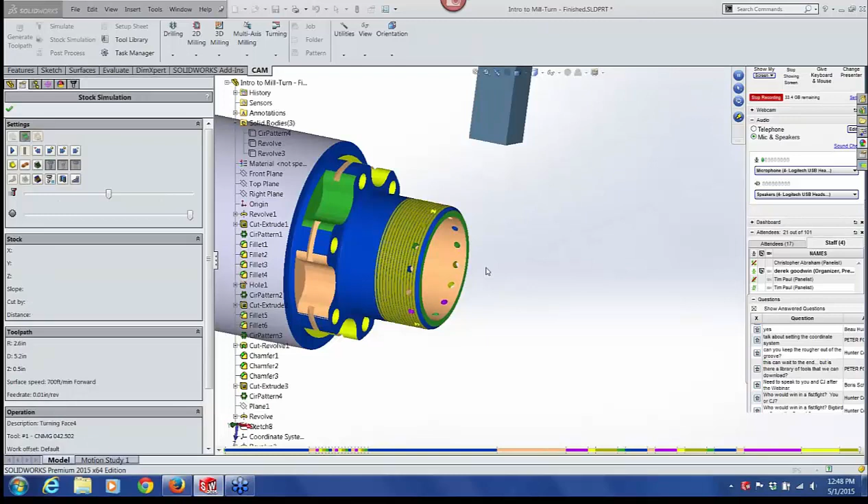Before I do - does something look funny to you guys out there? Do I have too many holes on this, or is that just my imagination? I guess there is that many holes. Okay, all right Tim, somehow you're logged in here twice, so let's try this.

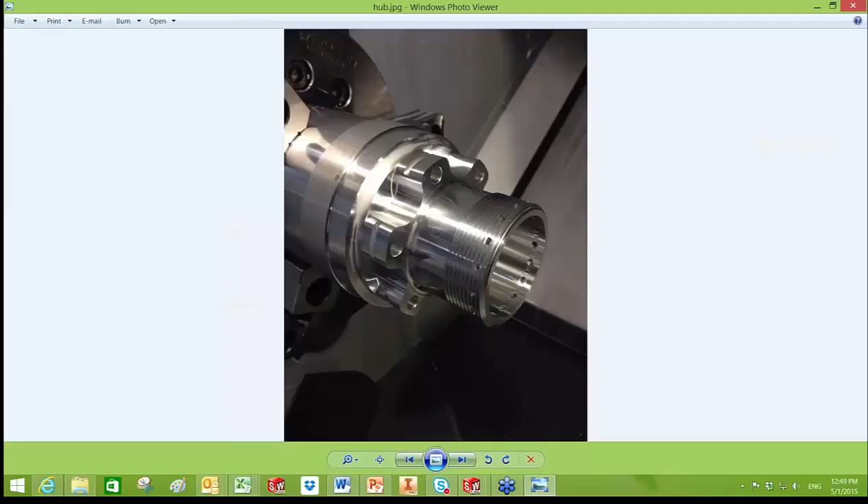Yeah, so it's pretty cool parts. They look a lot better in person than they do on a graphic on your screen, but it's always nice to see the difference between a graphic on your screen and the real part. So I thought some people might appreciate that. Thanks for sharing there. I don't know if you have any comments there, CJ.

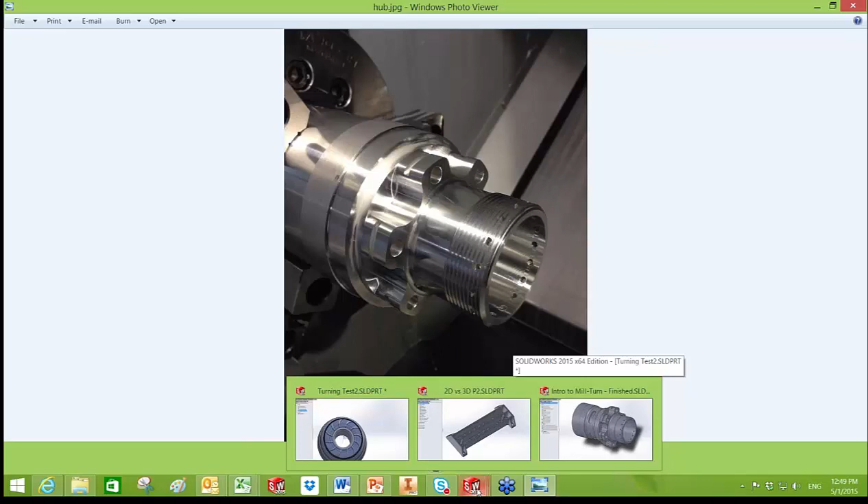What was the application for this part? So this is actually a hub for one of the wheel centers. There's lots of parts that go into the hub - there's the hub, there's the spider for the floating brake rotor, and that goes all into an upright. So this is a fully engineered part, not something that's just thrown together. In fact, one of the tolerances on the back end of the part is plus or minus 0.3 for the bearing fit. So there's a lot going on in this part - it's a real part, but it makes a good demo.

Yeah, it's fantastic. We definitely appreciate you sharing that with us, and especially having made the part so we can see that the program actually works. What machine are we looking at right now? This is a DS30 SSY, so it's Haas's dual spindle machine with Y-axis.

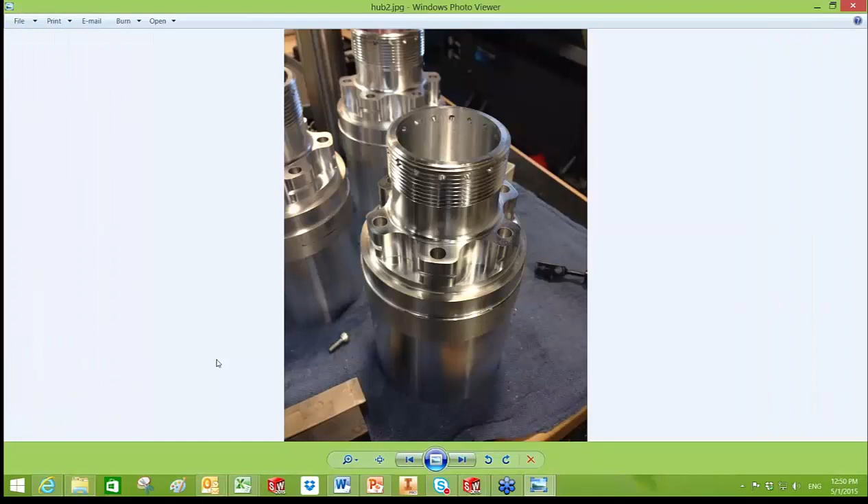So when you programmed this, did you do the stock transfer and program the backside of the part in the second spindle? Unfortunately I didn't, because the machine was on a demo floor, not in an HFO. They had a collet chuck on the sub spindle, so I didn't have any collet chucks handy with the right size. If there was a chuck, I would have been able to. Yeah, exactly - so work holding, as always, is part of it too.